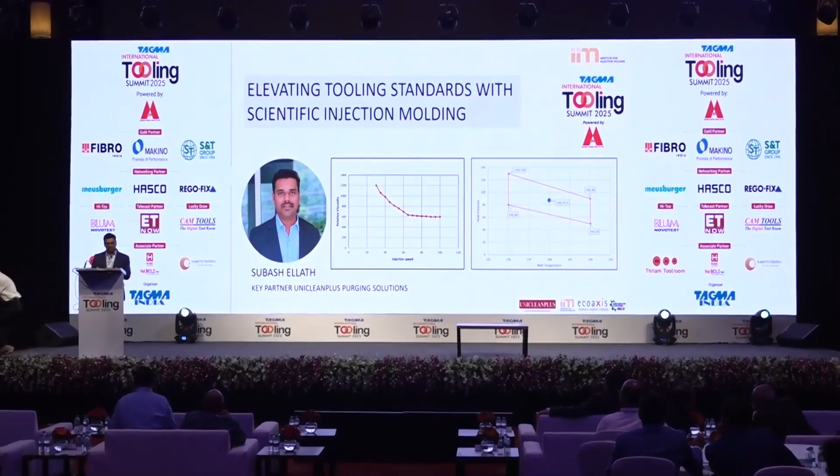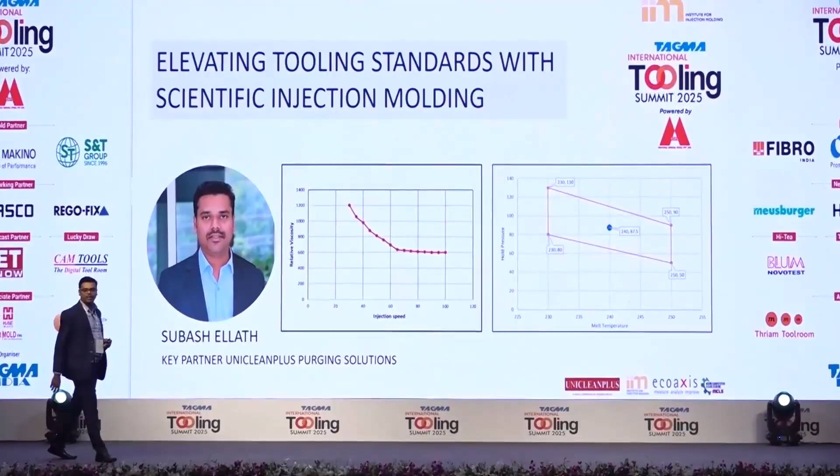So, once again, welcome you all to this session on elevating tooling standards with scientific injection molding. Okay, we have heard a lot about technology over 2 days. Now I am going back to the basics. I have been in business 5 years, and I started training the industry with a vision to advance the Indian plastic molding and tooling industry and make it a global tooling hub for critical components, by which I mean critical tolerance components.

I have worked in multiple companies, including Schneider Electric, L&T Tool Room, Sabic, GM Modular. Over 20 years of experience in molding shops, in rheology, in tool rooms, raw materials, mold development. So I will make this statement, everybody has already made it: 80% of injection molds face challenges with predictability in timelines after the T0 trial up to qualification.

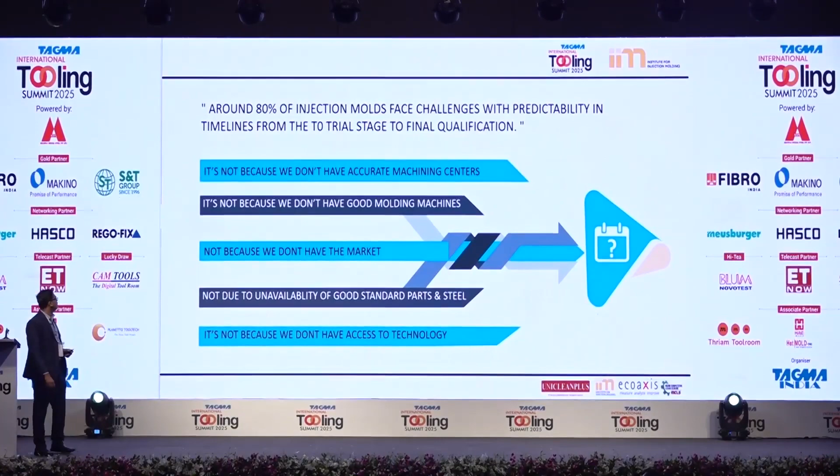It's not because we don't have accurate machining centers. We have a good number of accurate machining centers. It's not because we lack good molding machines. Neither is it that we don't have the market in India. Plenty of market is there, and day by day it's improving. It's not due to unavailability of good standard mold parts or mold steels. It's not because we don't have access to technology. Are you agreeing with me? Agreeing.

So what is the basic challenge? As per me, having worked throughout the value system of injection molding and the mold-related plastic industry, what are the challenges the industry is going through? There are a lot of new applications coming day by day. It's not all the old types of raw materials nowadays. There are a lot of copolymers, multiple types of raw materials, specialty raw materials. Specialty polymers with tight tolerance parts and extended product performance are the call of the day. And everyone is focusing on cosmetics, looks.

The molding process on the molding machine is tweaked quite frequently to achieve this level of aesthetics. There is a huge skill gap. Mold making has totally become an experience kind of thing. It has become like an art. Mold making is a science. There is science, calculation, experience of course, theory, practice and intelligence. Only with everything put together can mold making to that precision happen.

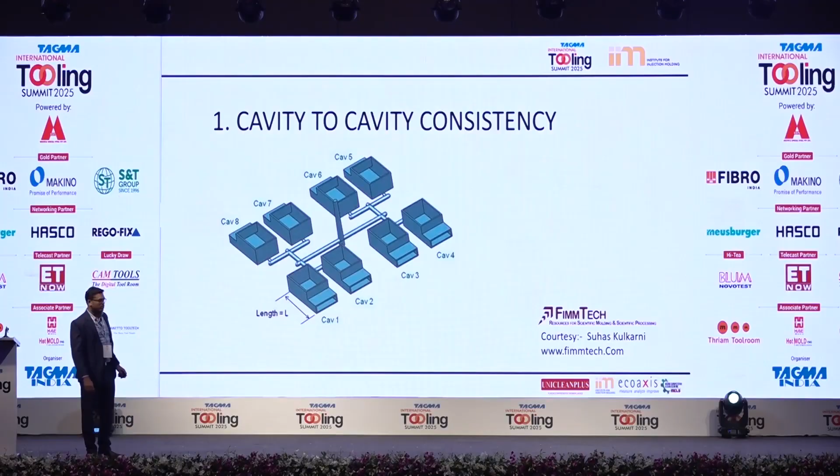When we talk of consistency in plastic molding, there are 3 levels of consistency. The first level is cavity to cavity consistency. It means if we have a mold of 8 cavities or 4 cavities, all the cavities should behave the same way. If one cavity is behaving differently, we cannot do any modification in the process setting. In terms of dimension, cosmetics, filling, pressure, air venting, all the cavities should behave the same way. That is the first level of consistency.

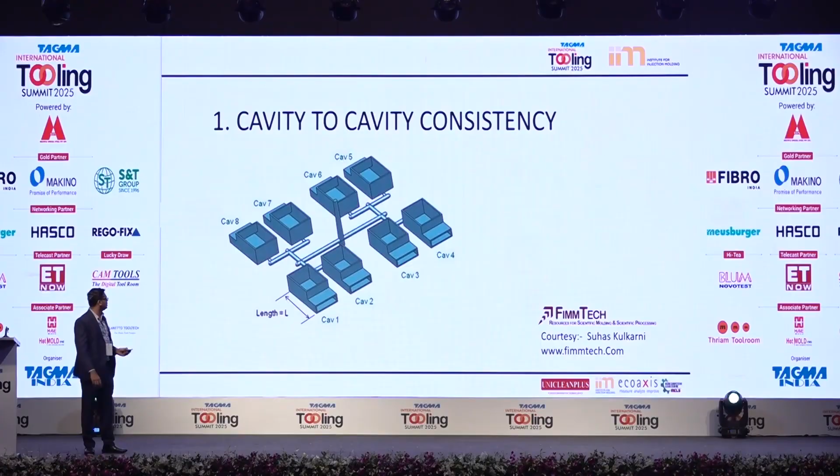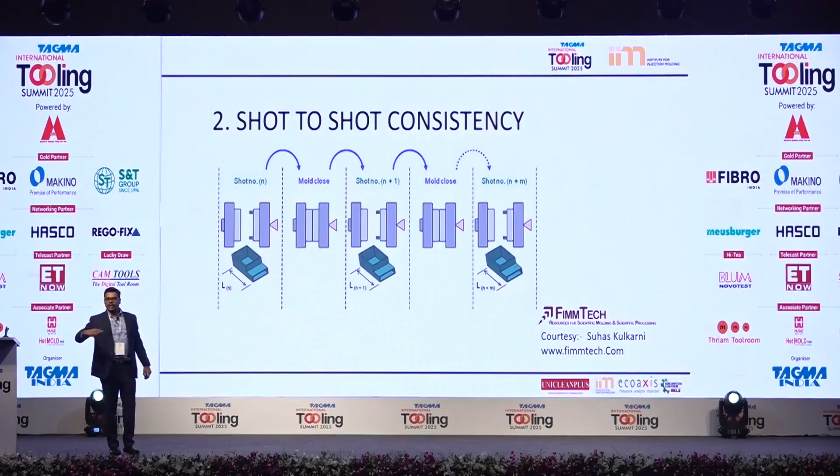The second level of consistency is shot to shot. If all the cavities are matching, well and good. But the morning shot and the evening shot, the part is getting caught, dimension is getting deviated. It was okay 6 months back. Suddenly, your raw material has some problem, the lot has changed. This is the consistency we are talking about, shot to shot. Every shot should match. This is the second level of consistency.

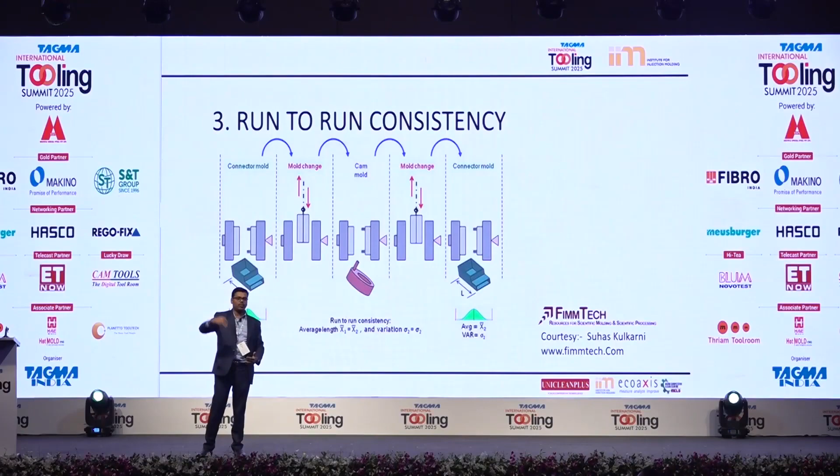There is one more level of consistency, known as run-to-run consistency. I loaded a mold today, ran it for 3 days, and took the mold down. After 6 months or 1 year, I load the mold again, and people tell you, we don't know what happened, the mold was running right, now it is not running right. I used to hear this quite frequently. When I was in SABIC, in the raw material field, finally when people have tried everything, they put all the blame on the raw material. Something has changed in the raw material, some magic. So this is known as run-to-run.

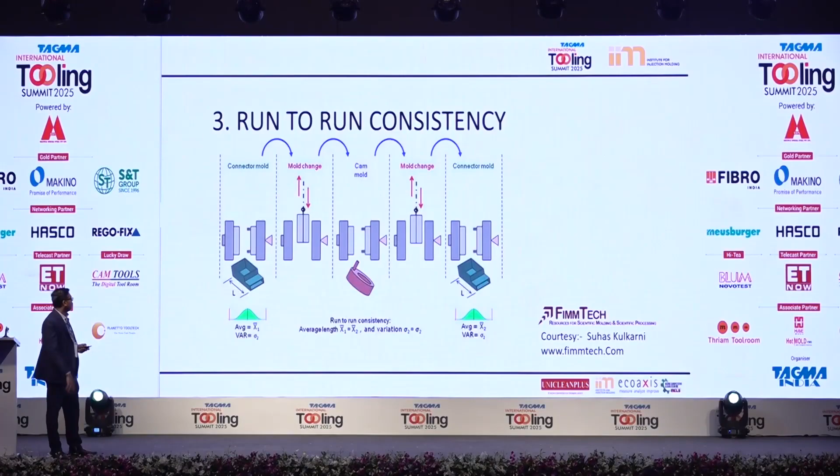If we are able to meet these 3 consistencies, then our life is good. We don't have to come early and go late from the tool room. That's my honest thinking.

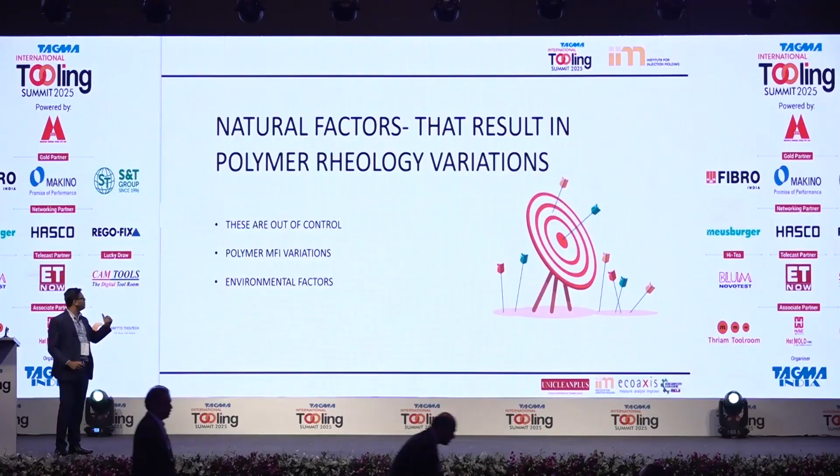If we machine the tool very nicely, correctly within tolerance, can we get this consistency? The tool is machined right, the mold is made right. What about the natural variations? There are a lot of natural variations that are out of our control. One could be polymer MFI variation. The polymer coming to us for molding goes through a long value chain. It comes from crude oil, converted into derivatives, then the monomer, then compounding, and we cannot expect every raw material lot to have the same MFI. MFI means the viscosity, the flowability, and it varies. So there is a natural variation.

Second, environmental factors. The temperature in the morning, at noon, and in the evening are all different. Different climates affect the mold, since the mold is in that atmosphere. So obviously the rheology is going to change.

Even though I will tell this, see, if you see a ripened mango, what is the color of a ripened mango? Yellow, orange. But if we measure, are all the mangoes the same in LAB values, color? No, there will be a difference. So whatever we get from nature has a variation inherently.

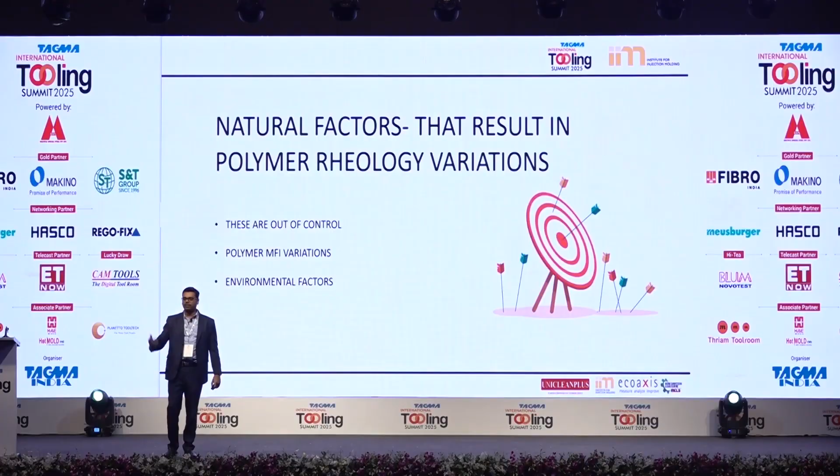But suppose ice cream is made of the same mango; if we get different colored ice cream, we will say it's a duplicate, correct? So in the end product no variation is allowed, but in whatever incoming material, variation is there by nature. So we are also in the same condition. Raw material variations are natural variations. Still, how can we produce a part which has no variation as per the tolerance? This is the tricky area where we are stuck.

So the solution for this is scientific injection molding, also known as decoupled injection molding. John Bozzelli coined this terminology, and many people like Suhas Kulkarni have done a lot of work and research on this and spread it across the world. It is the process in which natural variation will not affect the part. Whatever variation is there, you are still rescued.

It's the process that respects the polymer's inherent behavior, which nobody can change. No machine can change it, no mold can change it; its behavior remains intact. Understanding polymer behavior, processing it, or making the tool. It's the process in which the results completely depend on the creator, not on the molder. The molder doesn't have any work; he has to just load the program and run. Here the creator means the designer, the tool maker and the qualification. That's all.

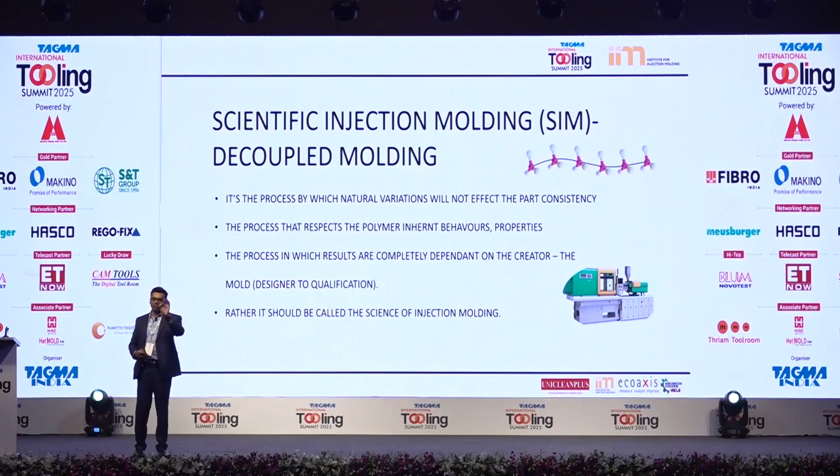Rather, I would call it, actually it should be, the science of injection molding. Since the name is scientific, many people ask, what is that? Something new inside? Nothing new. It's the basic science of polymer, the basic science of injection molding. That's all scientific injection molding is.

Before going ahead, most of you will know one property: Newtonian and non-Newtonian. When we talk about Newtonian, see water. For such fluids the viscosity, the thickness, will not change with respect to temperature. Suppose you are flowing water through a pipe at 30 degrees, 40 degrees, 50 degrees. The amount of water coming out will remain the same at different temperatures.

But think about the polymer we are processing. If you are processing at 250 degrees and you increase the temperature to 300, what happens to the polymer? Thickness is reduced. That's why you are able to somehow fill an extra lengthy part, correct? So water is Newtonian, but the polymer we are molding, is it Newtonian or non-Newtonian? Anybody? Non-Newtonian, correct?

But I'll ask you one thing. If you operate with a material where with every degree of temperature change there is a viscosity change, can you get consistency? Never can you expect consistency if the thickness keeps changing with every degree of temperature change, meaning every shear change. So the beauty of our polymer is, at certain shear rates, the polymer becomes Newtonian because its viscosity doesn't change. We have to find that point and process there to get consistency. That's the first step of scientific injection molding.

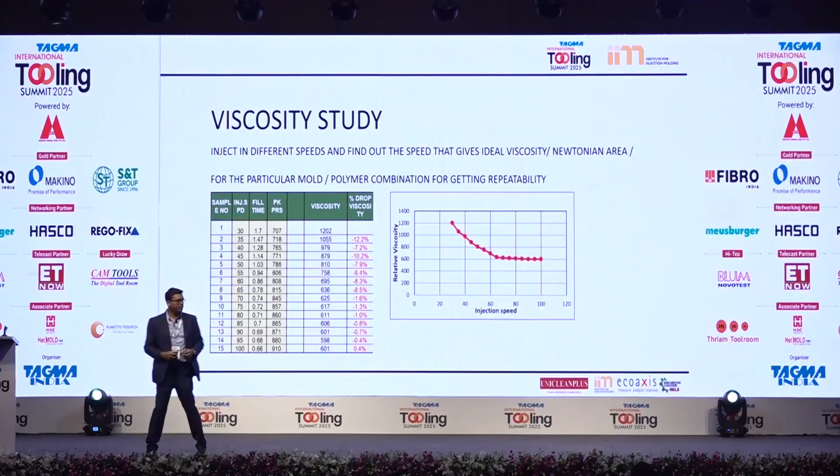This area is the Newtonian area, where any change in shear rate will not affect the viscosity. Okay. So if you are able to inject in that area, of course, you should have very good tooling strength, because you will get air entrapment issues, burning marks, near-gate marks, all these things. That's why I say scientific injection molding is a tool maker's business, not a molder's business. So this is the Newtonian area you have seen. You have to operate in that area, first of all.

Second is cavity balancing. In cavity balancing, we take out the cavities and measure the weight in a precise way. If it is within 5%, it's okay, and we can go ahead. If there is a variation, we have to find out whether it's due to cooling difference, machining difference, air venting difference, or gating difference. Air venting, everything has to be plugged within the second step of scientific injection, not after qualifying the part.

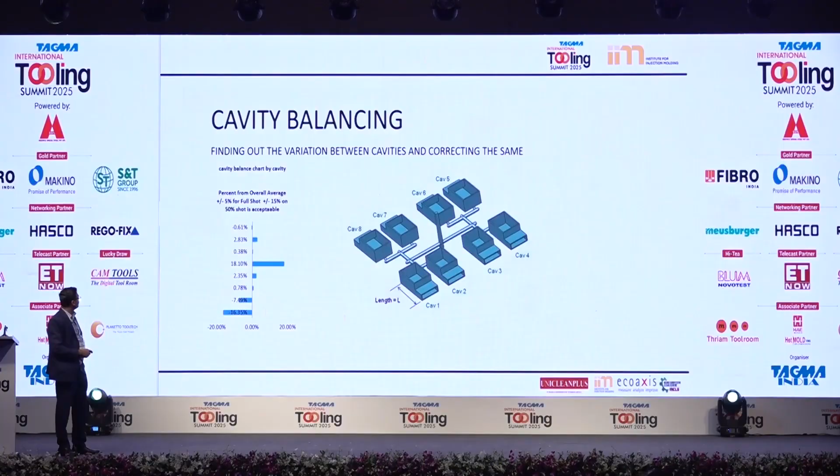Okay, then the pressure drop study. Here we are studying how much pressure drop happens in the system. First in the machine nozzle, wherever there is a restriction, pressure drop happens. First the nozzle, then the sprue bush, then the runner, then the secondary runner, and it can be in the gate and in the part. So we need to really identify where the pressure drop is happening. If the pressure drop is happening in the runner and you are correcting the gate, you will not get any benefit.

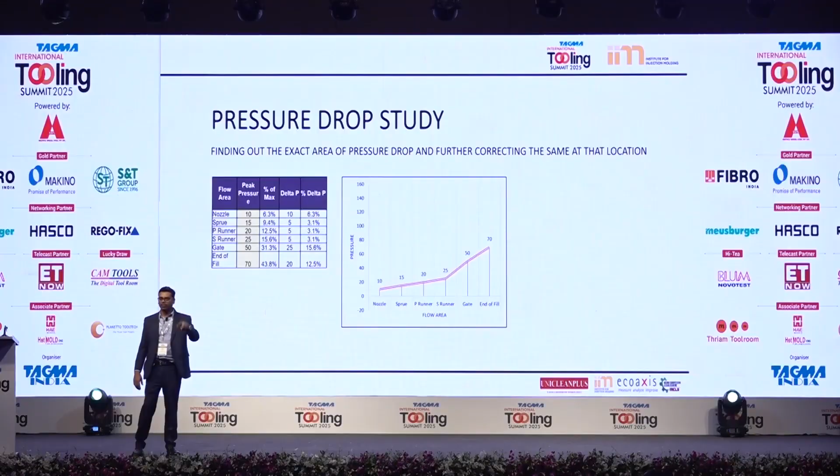This process is done to understand where the pressure drops. If a pressure drop is happening in the part and you keep on increasing the gate, the part will not fill. Finally, after 6 months, you will come to know the part thickness is less. Either you go for a higher MFI grade or you go to the customer and ask to increase the thickness. But this study will show you where the problem is. Immediately you can plug it. And even mold flow shows it, if you are really noticing.

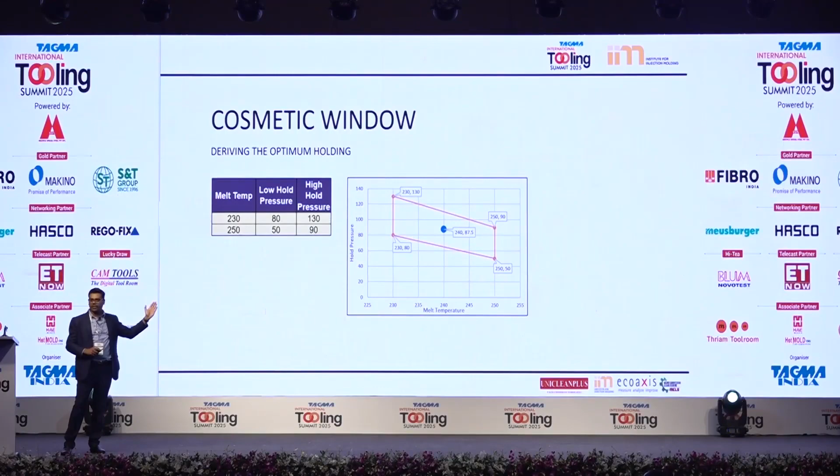Okay, then comes the cosmetic window, the holding. Till this time, we will not put any holding, we will only be doing injection. This is the cosmetic window. Above the cosmetic window means flash, lower means sink mark. We will identify a window, pick the center point and start the holding parameters.

The next thing is known as the gate freezing study. Here we keep on increasing the holding time from 1 second to 2 seconds, 2 to 3, and we keep on measuring the weight of the part. For bigger automotive parts it may not be possible in some cases, but in smaller critical parts this is very much possible and it has to be done. So we keep on increasing. After some time the gate is frozen, meaning nothing will go inside. So this time has to be determined.

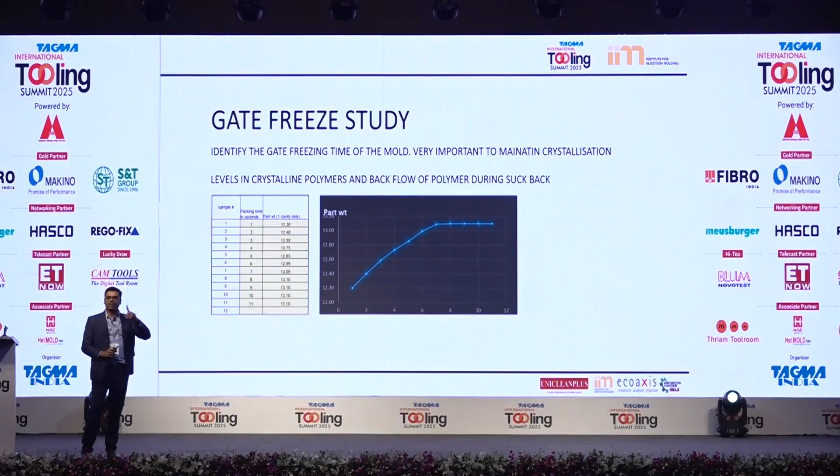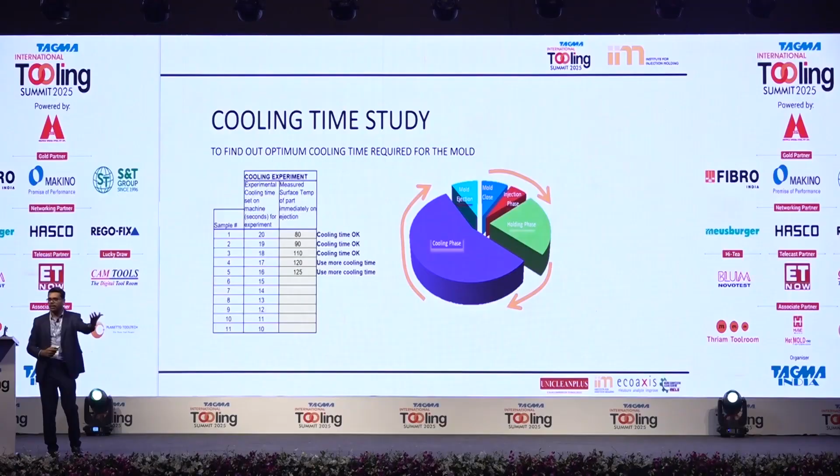Otherwise the material does not become crystalline. You will not get consistency, warpage will come, your dimensions keep on changing. You say the dimension suddenly changes after some days, because crystallinity is not met. Okay. Then comes the cooling time. Cooling is money, 60% of cycle time is cooling. So based on the HDT, measure the part temperature and take a call on how much optimum cooling time is required.

Then if I talk about the qualification in the same way, the first step is deriving the molding process. Second, cosmetics, and finally only the dimension. Never touch the dimension at the T0 time. Because if you change the gate, your dimension is going to change, especially for crystalline materials. Higher the crystallinity, the more you are in trouble. You will not have the steel to correct later on. So dimension is the last. First the process, air venting, do everything, then only go for that.

Okay. So the knowledge one should have: plastic raw material behavior. Plastic raw material behavior is very, very important. We cannot avoid that and go with scientific injection molding or critical parts. We cannot do it. Okay. Not just reading MFI on the data sheet. No. Understand the rheology behavior. That is important. Material selection from the data sheet: go into the data sheet in a little more detail. The shear rates. Mold design.

Shear rates. I have seen the whole industry overlook the shear rate. Most of the people are not aware of the shear rates. So that's why I put the feed system sizing. Sizing and construction is very, very important. Cooling and venting. Feed system sizing is not just experience. The first level of feed system sizing is as per the shear rate of the raw material. Then it goes to the mold. We have to see the pressure drop study, gate freezing study, then experience. All put together is a feed system design. Not just experience, I mean to say.

And for product design one should know the thumb rules and predictive analysis, mold flow report interpretation. I am not talking about mold flow report making, but interpretation. A lot of things are hidden inside the mold flow report that have to be properly interpreted. Material preparation, process establishment by the decoupled method as I told you, root cause analysis, and auxiliary machine and machine sizing and selection are also very, very important. Okay.

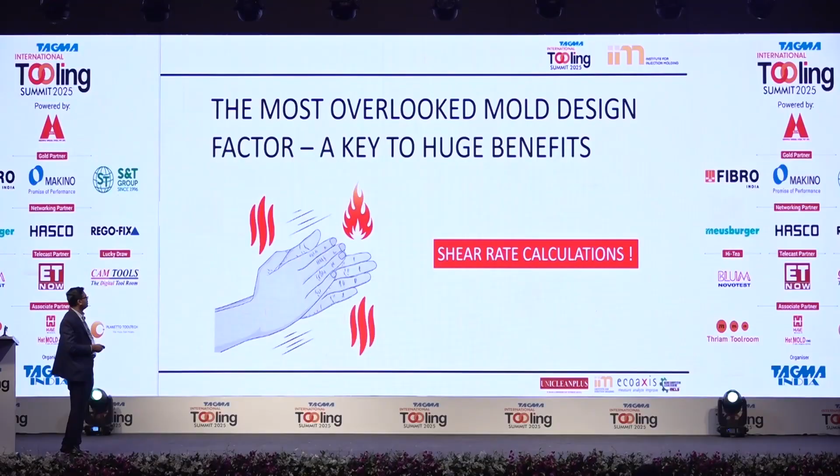But if you are able to maintain every gate within 5 to 10% shear rate, your aesthetics automatically come. Every gate within 5 to 10. It's a challenge. You can ask some auto people, it's a challenging thing. Okay. You can get a very good aesthetic part, because in automotive most people are struggling with aesthetics and shining, all these things. Okay. Yes, done.

So to end this, consistency can only be achieved when a creator knows the molding process and the root cause. Molding process means you should know how to make that graph, you don't need to just know how to set the molding machine. Okay, then mastering this approach paves the way for excellence in molding and productivity. Okay, that's all from my side.